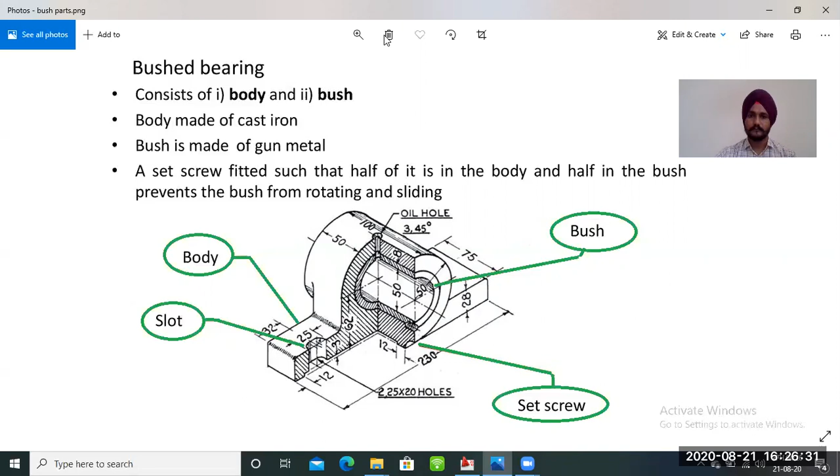You can see the bush bearing and their parts. This is the body of bush bearing, I'm going to mark it. This is the body front view, this is top view of body, this is the bush that we will insert in the body of the bush bearing.

So let's start the drawing. First of all, we will draw the body of the bush bearing. We will draw the line of 230 mm.

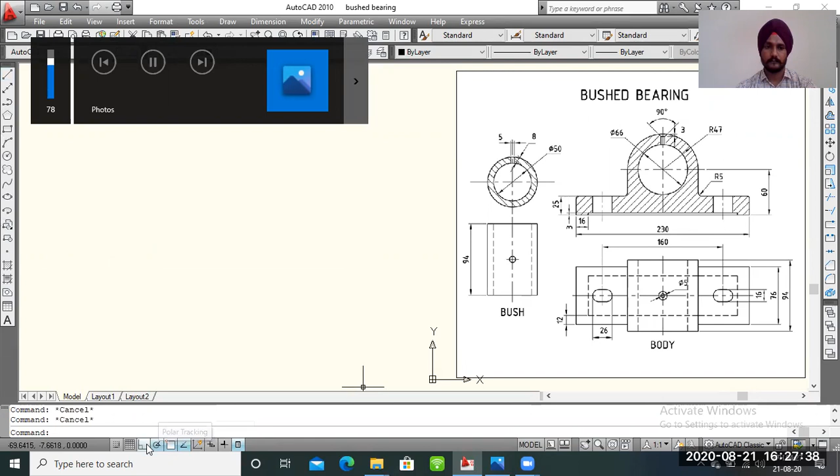After that, I will draw the thickness portion, that is 25 mm, that is height of the bush, body of the bush.

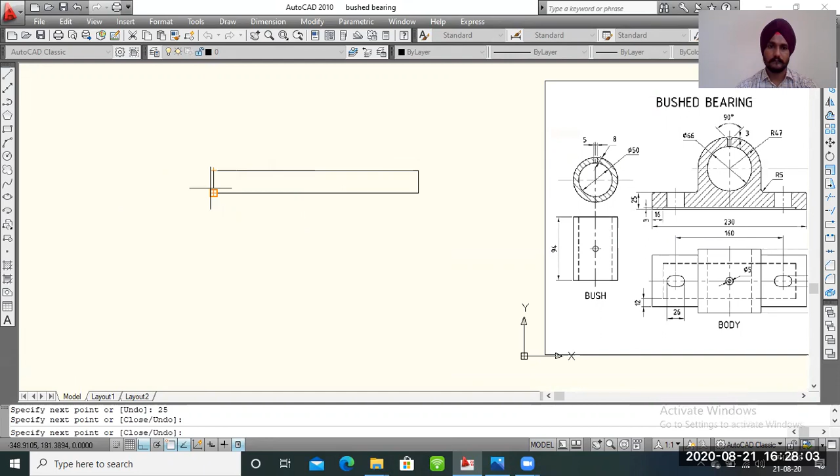Then there is a hole of radius 47 and diameter of 66 mm. We will draw the hole with the help of circle. First of all, we will locate the center of the hole. This is from the bottom of the body, 60 mm offset from the bottom of the body. So we will draw this offset of 60 mm from the body.

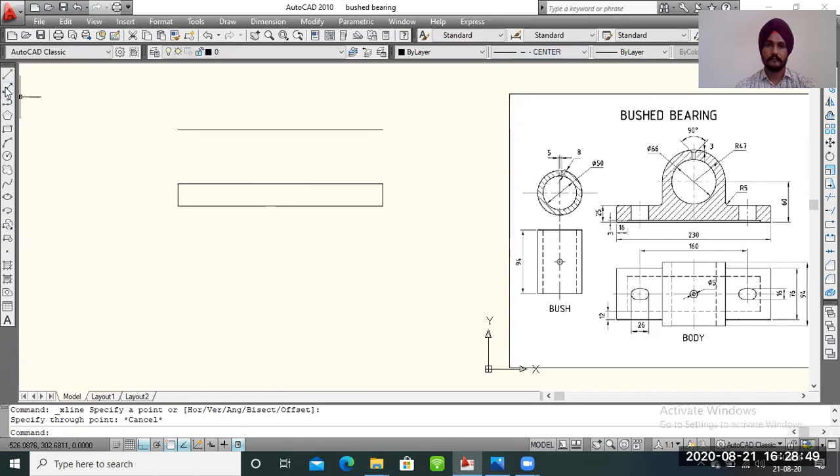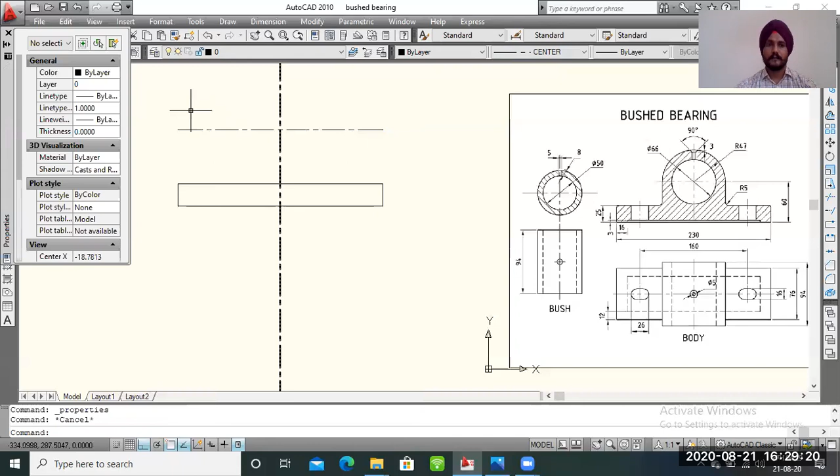After that, we will draw the center line. Center line is used in drawing to locate, to indicate the center of the circle in the drawing sheet. So I'm going to draw a circle of diameter 66 mm and another of radius 47 mm.

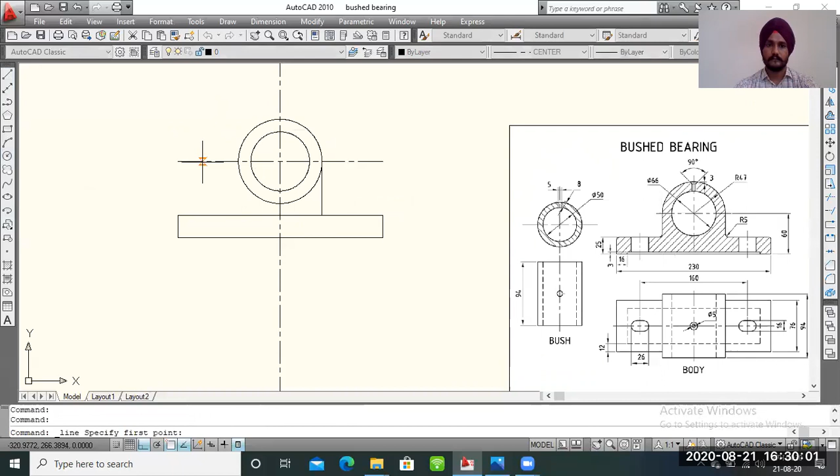After that I will trim this line. I'm going to remove the extra portion in the drawing.

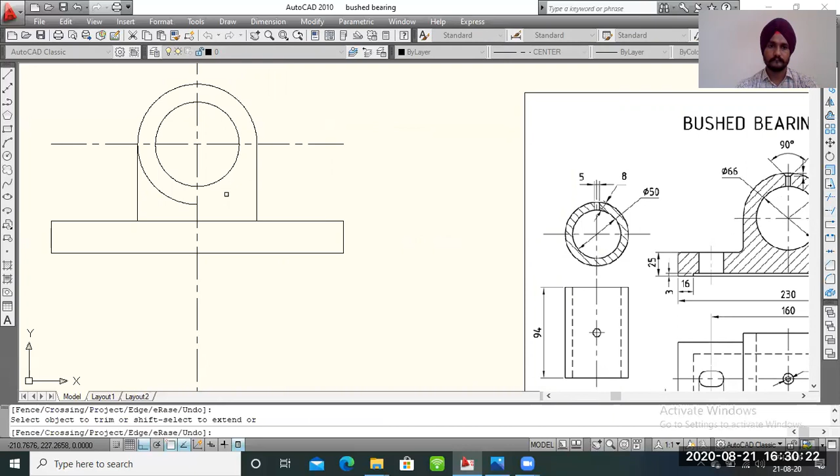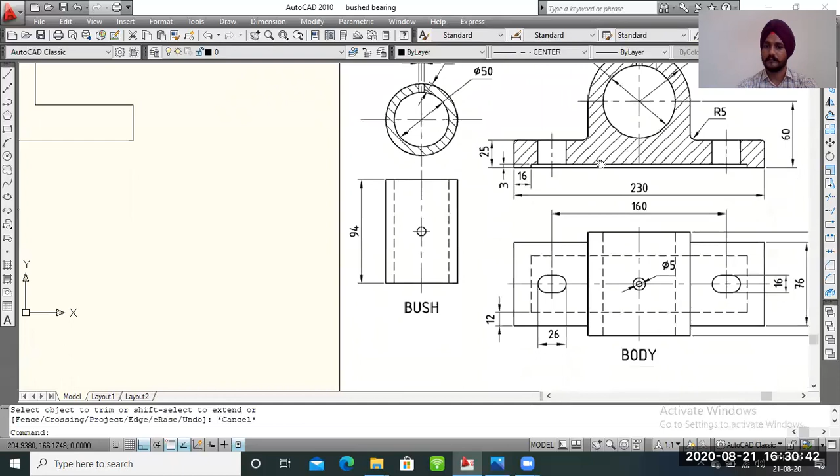Now I'm going to draw the thickness rib of slot of thickness 3 mm from the bottom side of the drawing. You can see there is hidden portion at the top side of the drawing. The thickness of slot is 3 mm and the offset is 16 mm from the edge.

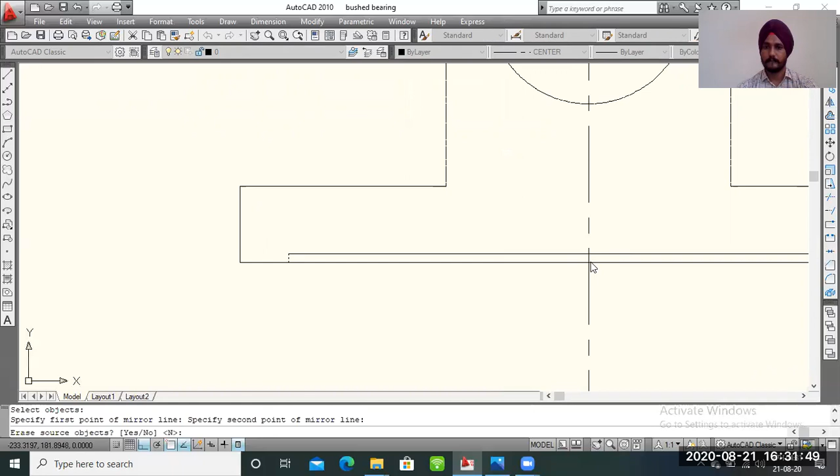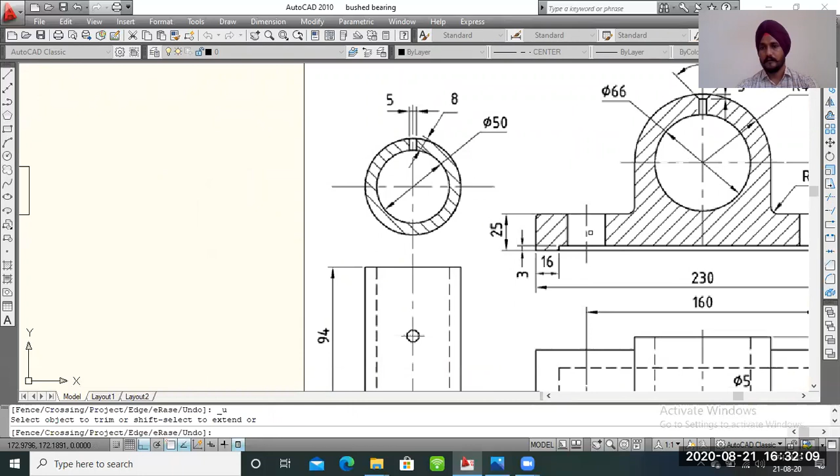I'm going to remove the extra portion in the drawing. Now I'm going to draw the slot that is used to hold the bushed bearing on a table. The size of slot is 26 mm and the center to center distance is 160 mm.

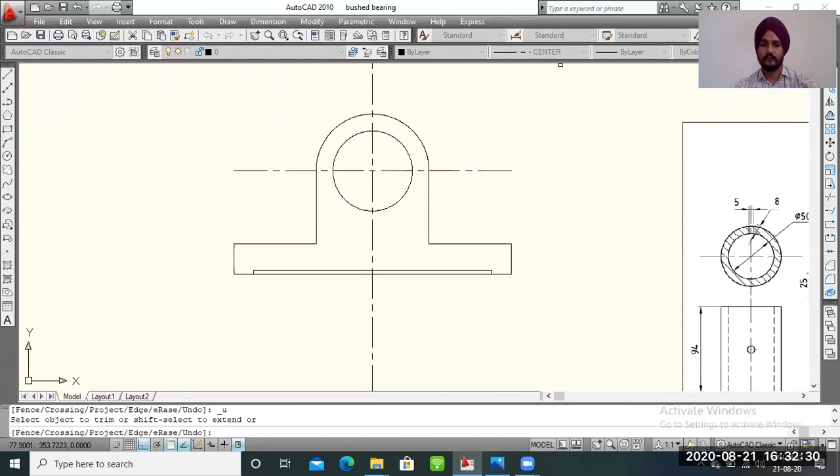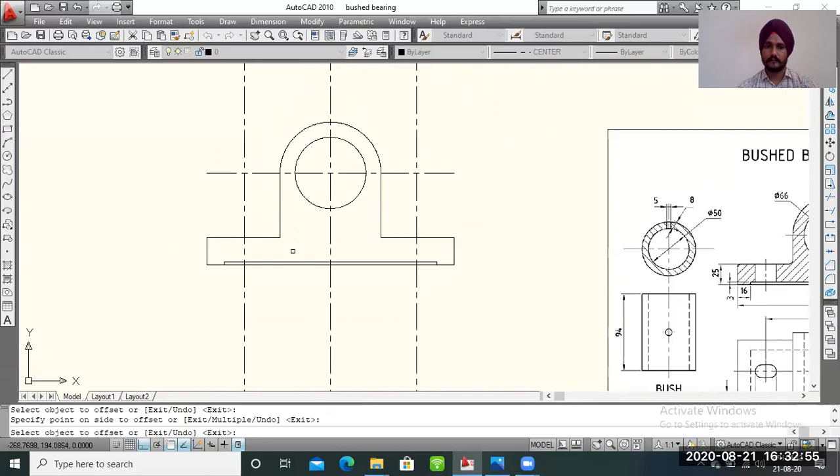So I am going to draw a line at an offset of 80 mm because the drawing is symmetry. The size is 26 mm, so I can take another offset of 13 mm on both sides.

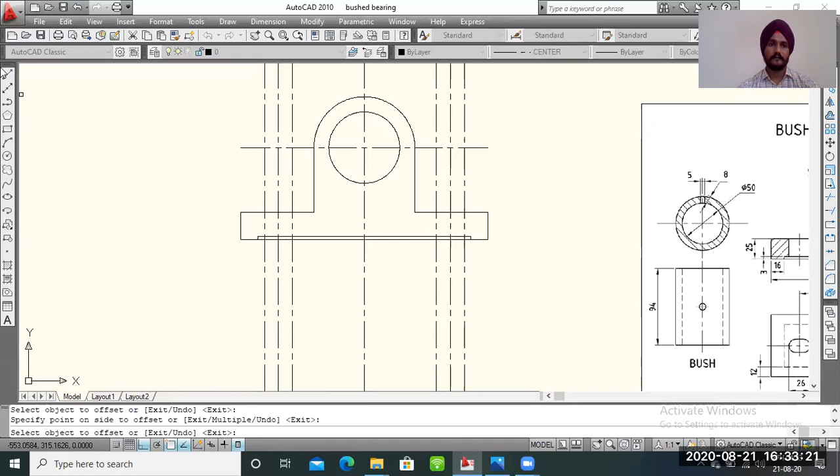Now I will finalize it. I will go to remove the extra portion in the drawing.

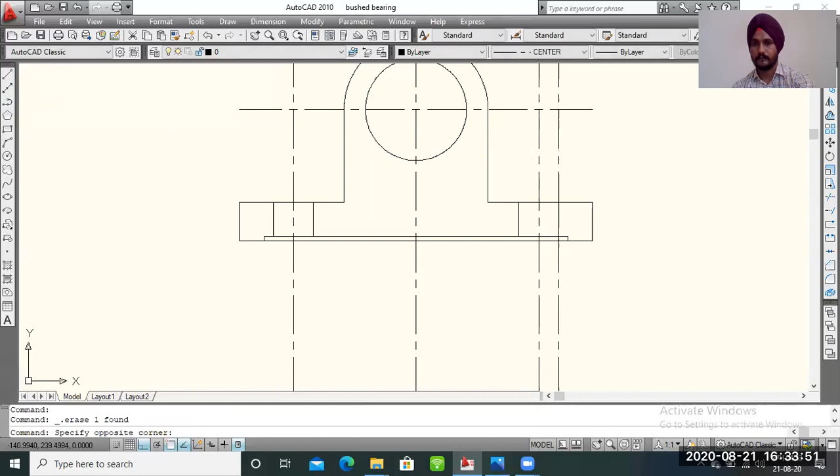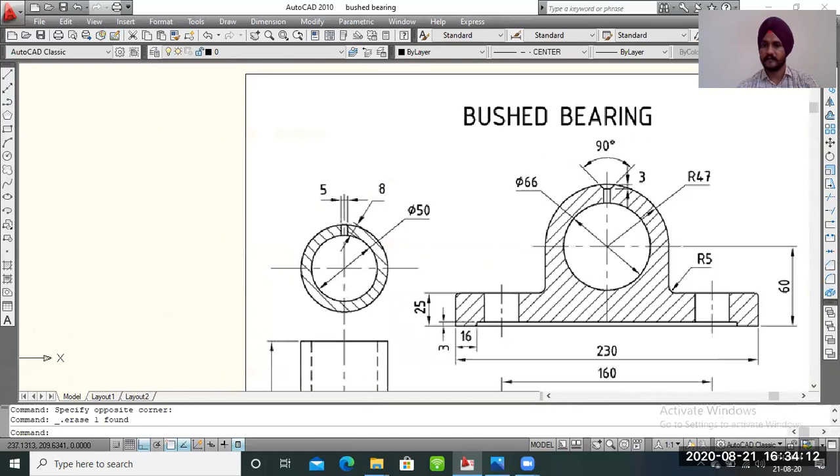Now I am going to draw the portion of oil hole in the bushed bearing. The dimension is 3 mm width and the diameter is 5 mm. So I'm going to take an offset of 2.5 mm.

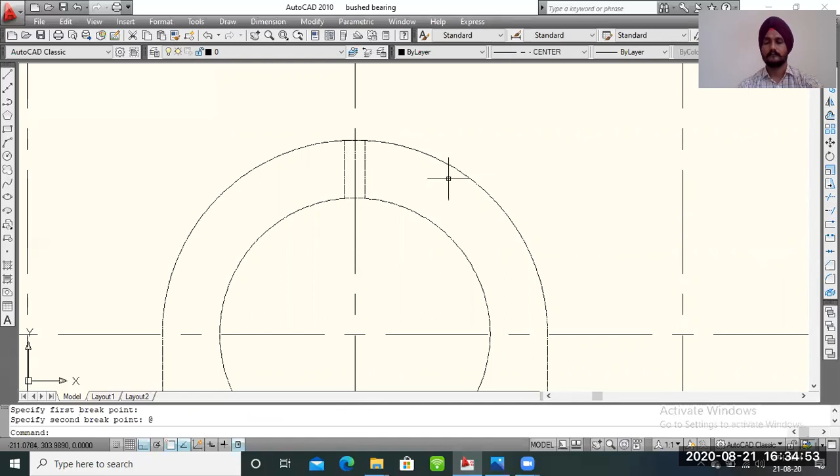and the depth is 3 mm. This should be 3 mm and the angle is 90 degrees.

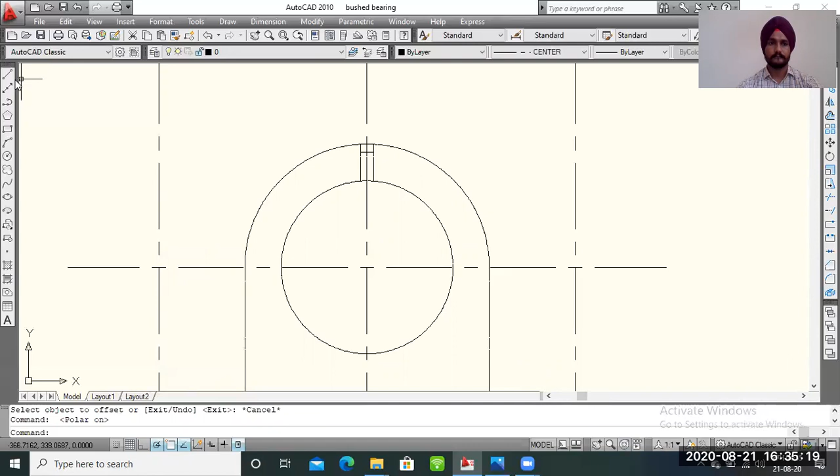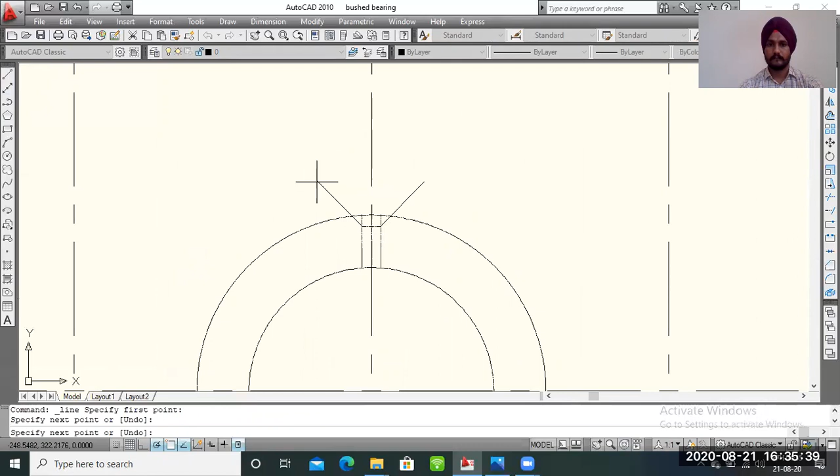So I'm going to mark it. Going to remove the extra portion in the drawing.

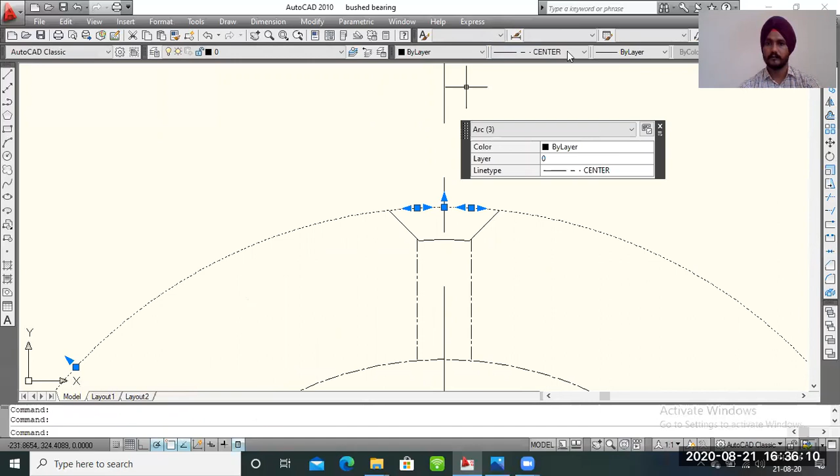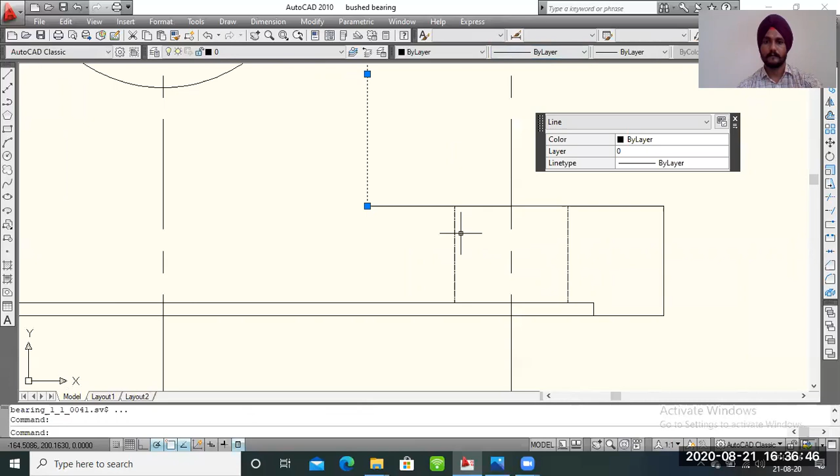The drawing is visible, so I'm going to mark the continuous line. This line should be continuous.

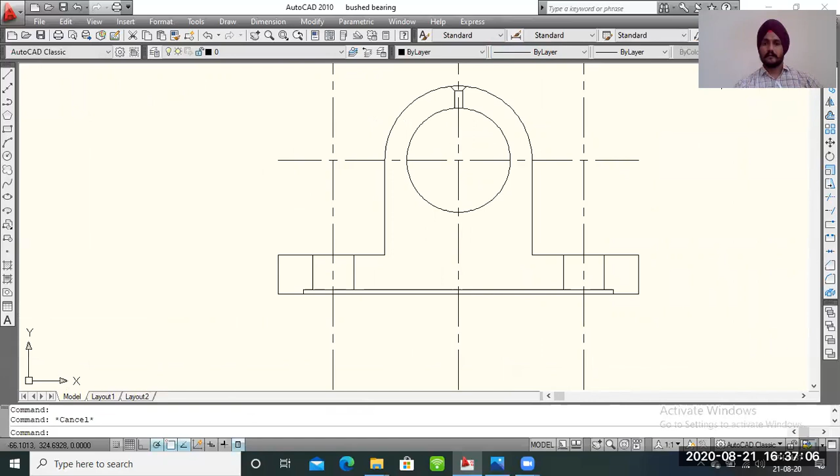So center lines are used to locate the center point of the circle or locate the symmetry of the portion. Next, this is the front view of a bushed bearing, body's front view of a bushed bearing.

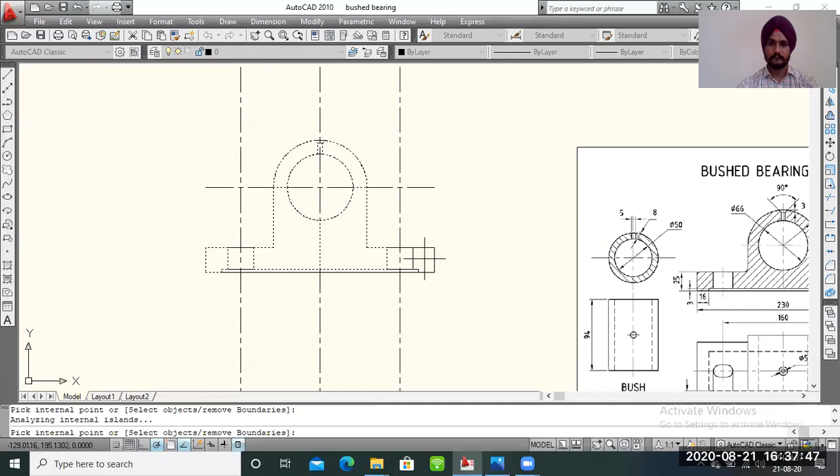Now I am going to section the portion because this is a cut sectional view of the front side. So I am going to mark the sectioning line in the front view. It should be like this because this is a cutting plane line. You cannot show the cutting portion of the drawing in visible side. We have to complete the drawing with sectional line. So this is the front view of the bushed bearing, body of a bushed bearing.

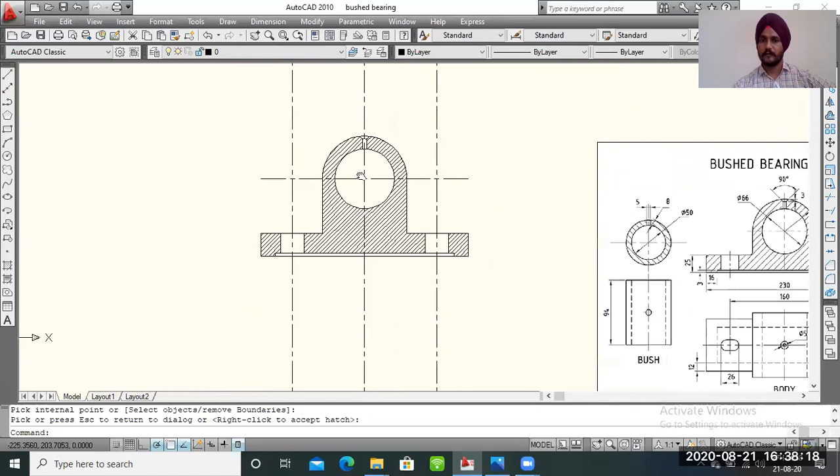So next I will draw the top view of the body. Simply I will project the projections. In drawing you can use the 3H pencil, 4H pencil for the projection lines. You should use H pencil for object lines and 2H pencil for dimension lines and center lines. So you should follow all the pencil grades in drawings.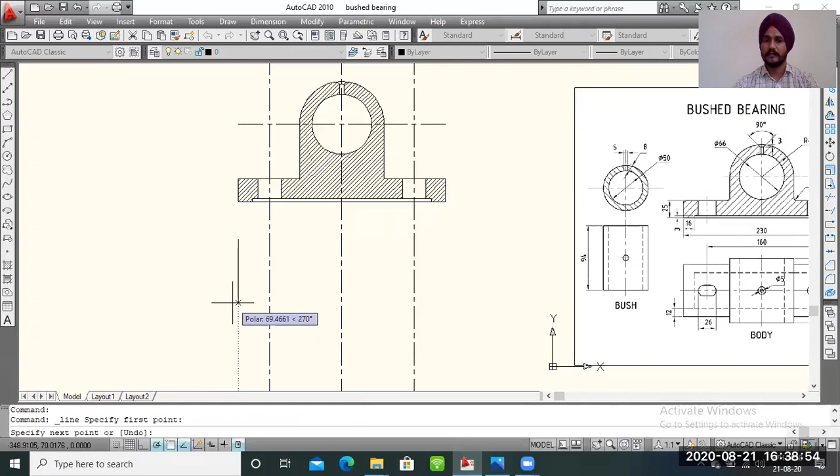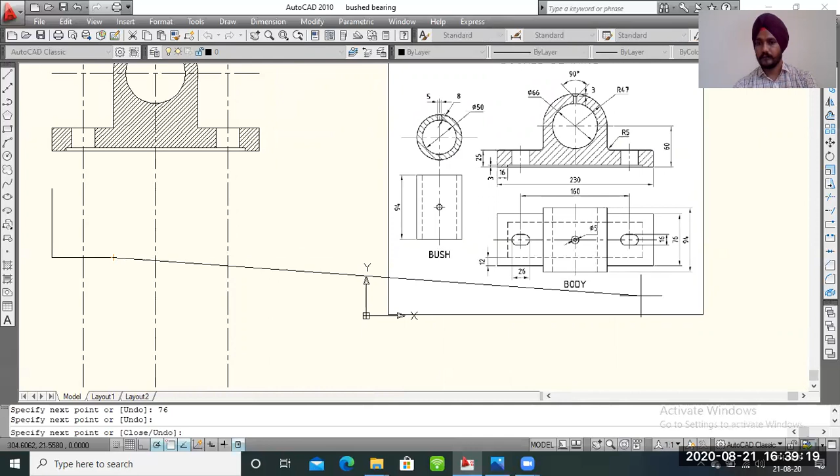So I'm going to draw the top view of the body. So the dimension of top view is 76 mm, width is 76 mm. So I'm going to mark a line of 76 mm. Then I will project the drawing. This portion is 94 mm in width, so I will take it according to this.

Projection lines make your drawing very easy. You can project your lines from the edge of the front side at the top of the view and easily draw. With the help of projection lines, you can easily draw the top view in the drawing. You can easily project the width of the object, and with the help of length you can easily draw the width of the object.

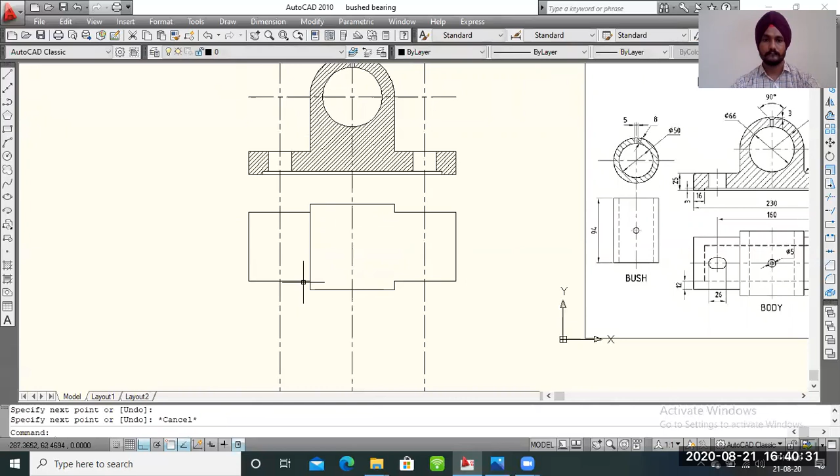The hole is the internal portion of the drawing, so it will be drawn as a hidden line. I will use the hidden line to draw the hole in the drawing sheet. I will project the diameter of the drawing to this and this.

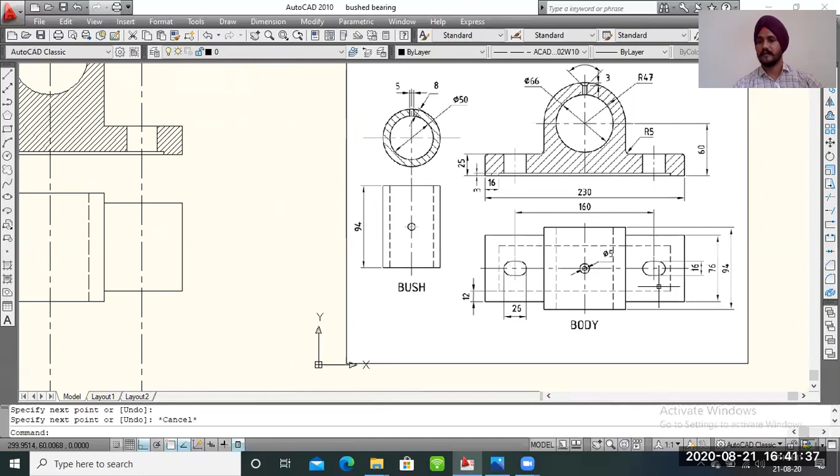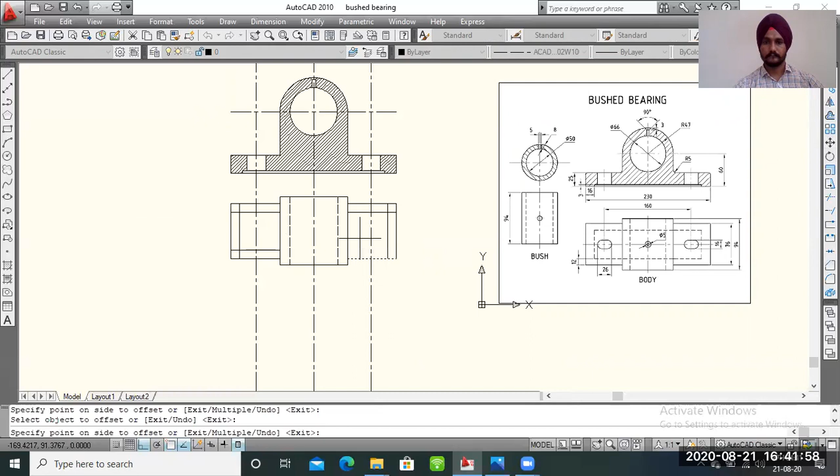This is the hidden portion, the internal portion with radius diameter 66 mm. Then there is a slot that is 3 mm in depth, so we will draw it. The size of the slot is 12 mm from each side, from the bottom, from the top view of the drawing. So we will minus 24 mm, 12 mm from each side of the drawing. I will take an offset of 12 mm and draw it. Like this you can complete it easily.

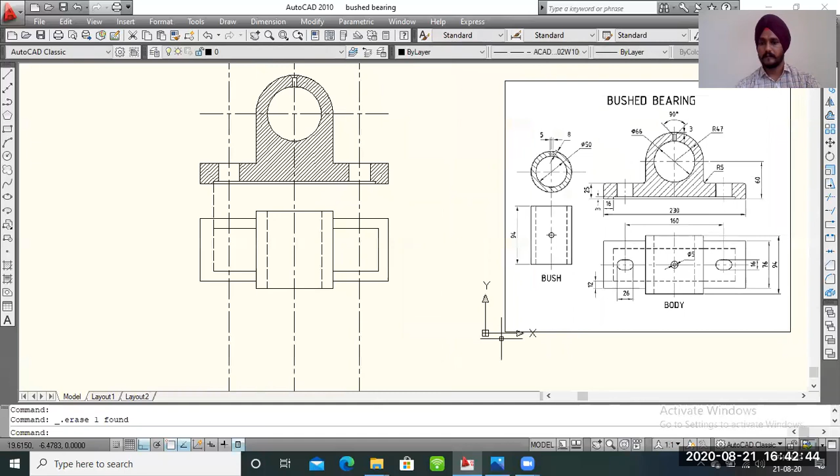This line is 60 mm. This is not 12, this is 16 mm. So I'm going to mark it again. This is 12 mm vertically, and horizontally it should be 16 mm.

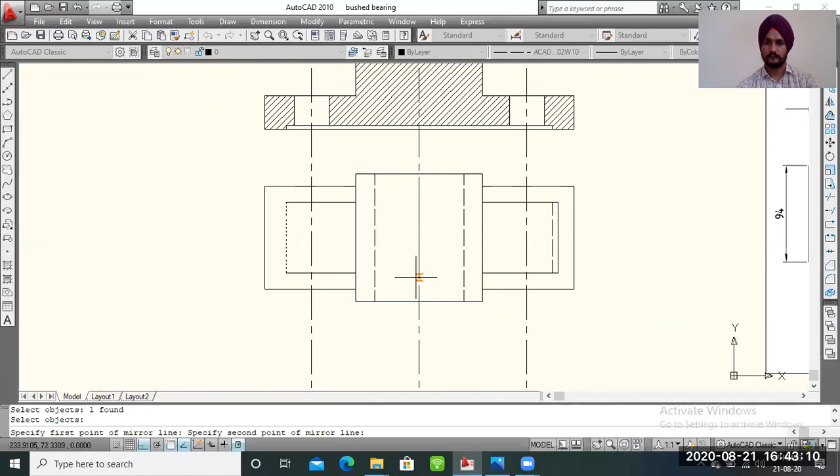Automatically you can control it.

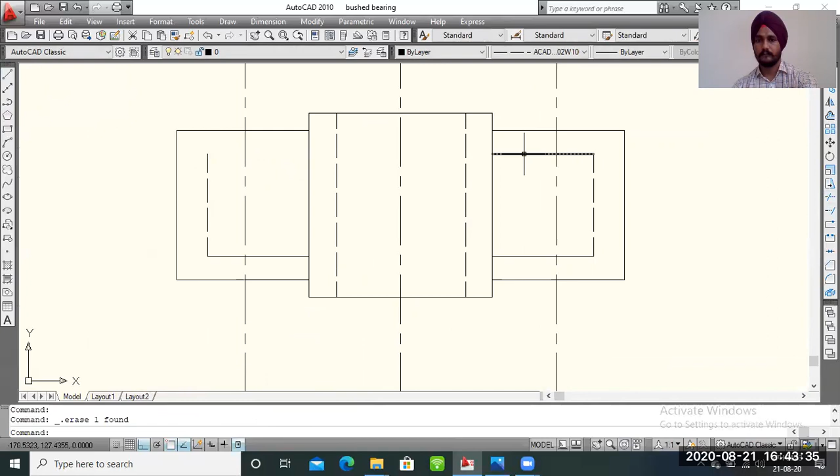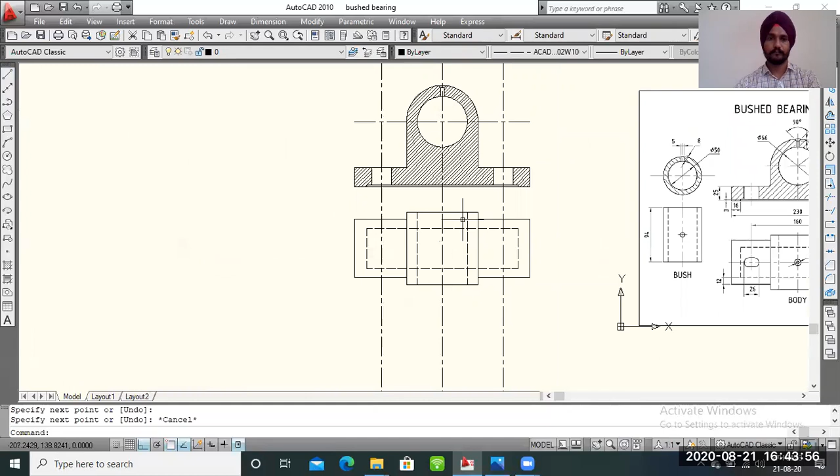This is the hidden portion, because from the top of the drawing object you cannot see this, so you have to mark it as a hidden portion. There is an oil sump in the middle of the drawing, so the diameter is 5 mm. This is visible from the top, so you will have to draw it as a visible line.

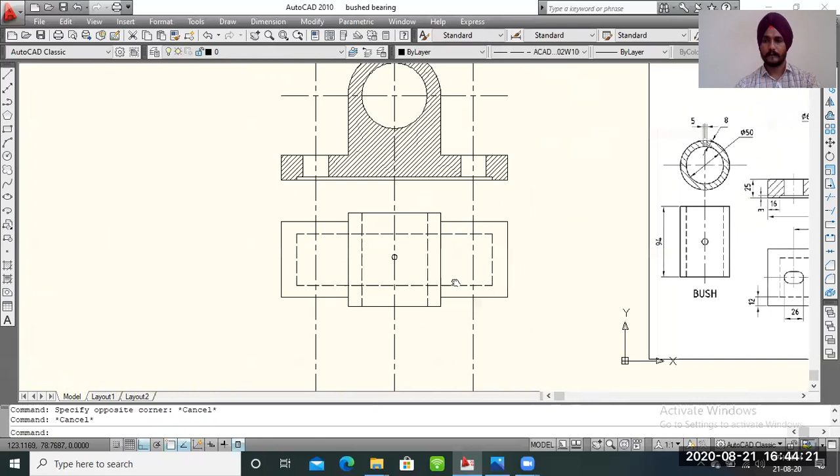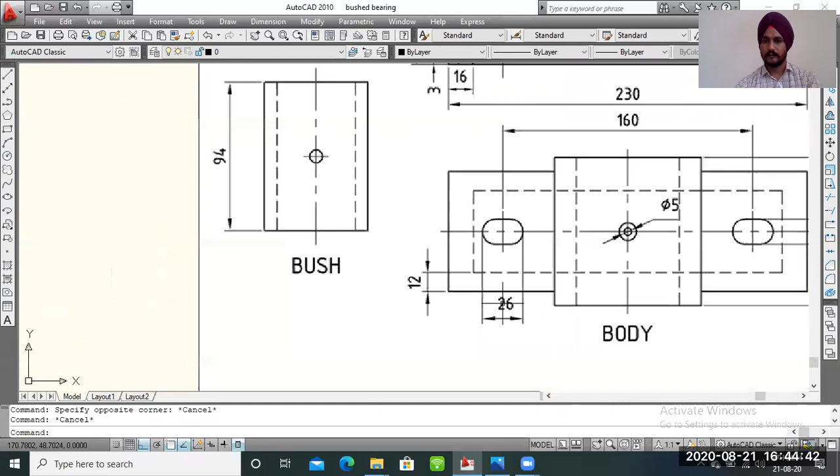Now we will draw the slot, the length and width of the slot. We will project the length as 26 mm and the width as 12 mm. The radius is not given in the drawing, so we will draw the rectangular sides of the slot.

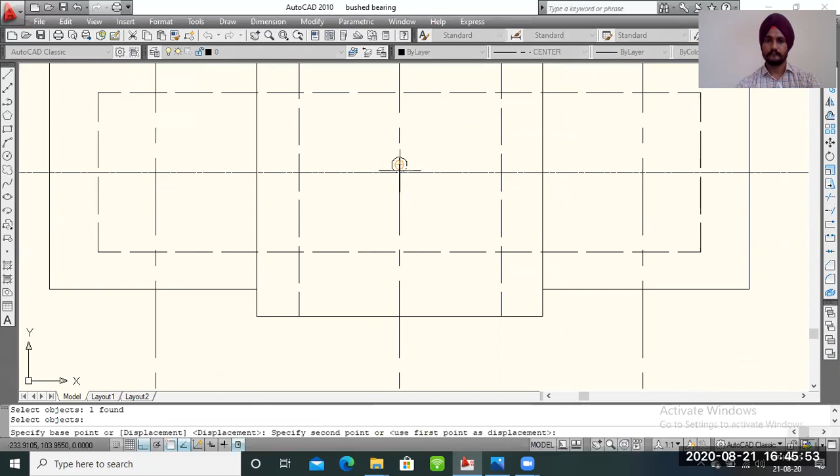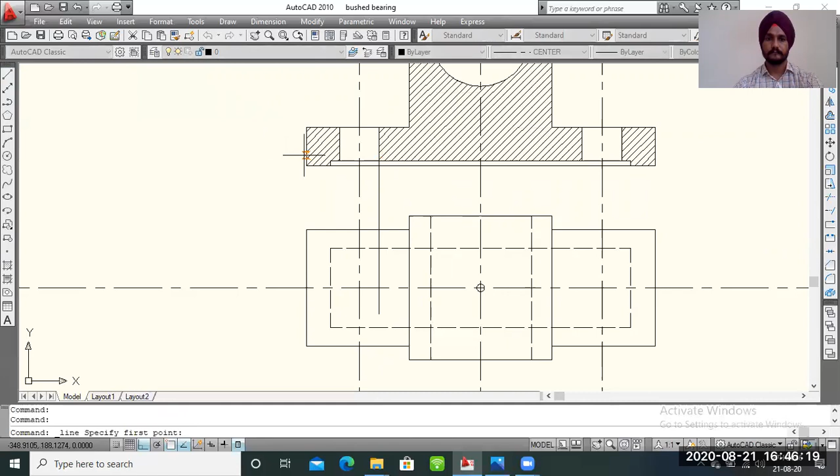After this, we will project the length of the object from the top. The projection line should be drawn with the help of a 3H or 4H pencil. It should not be merged with the object or dimensions.

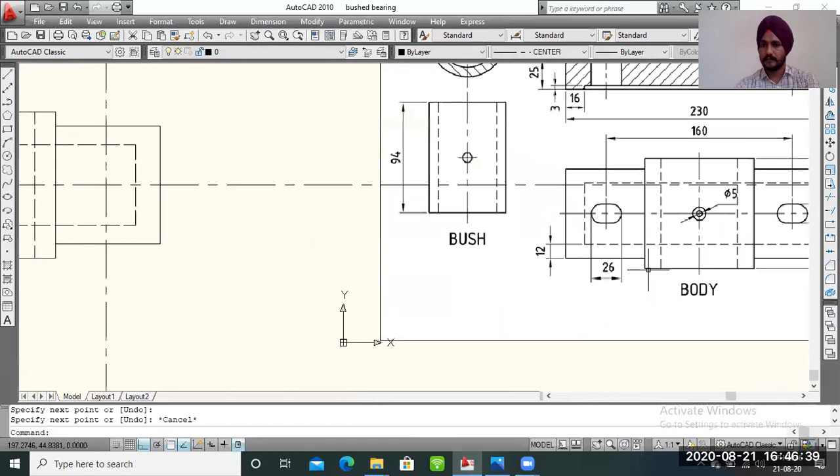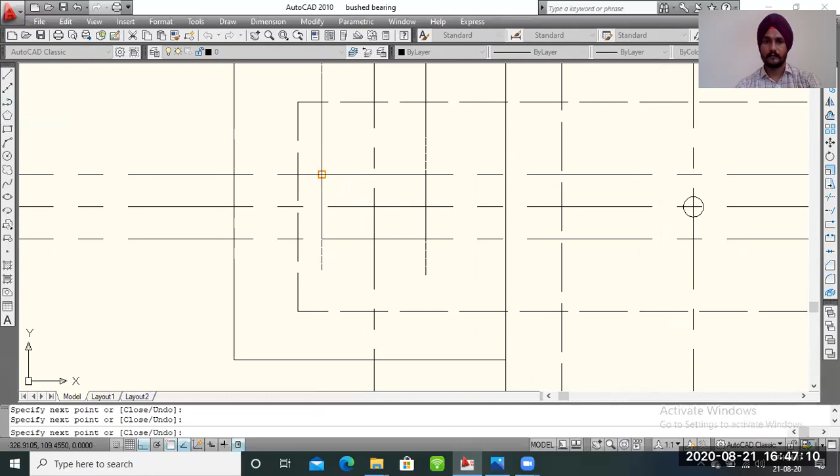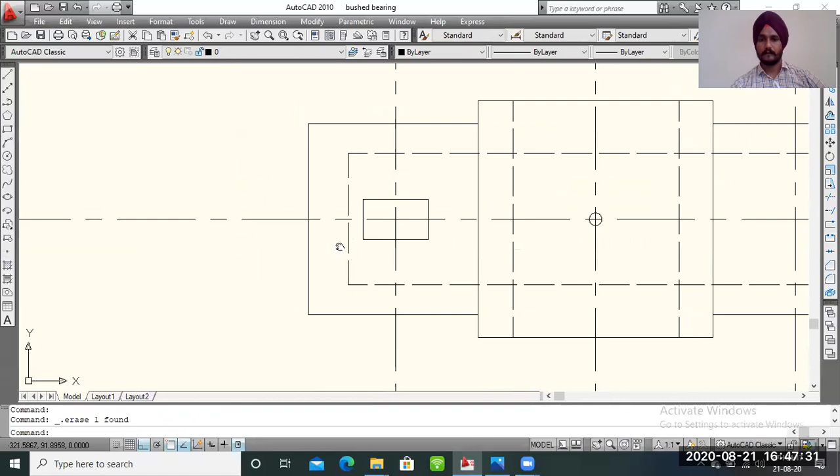This is the portion of the top view. This is the body's front view and this is the body's top view. We have completed the drawing of the body. Then we will assemble the components in the body.

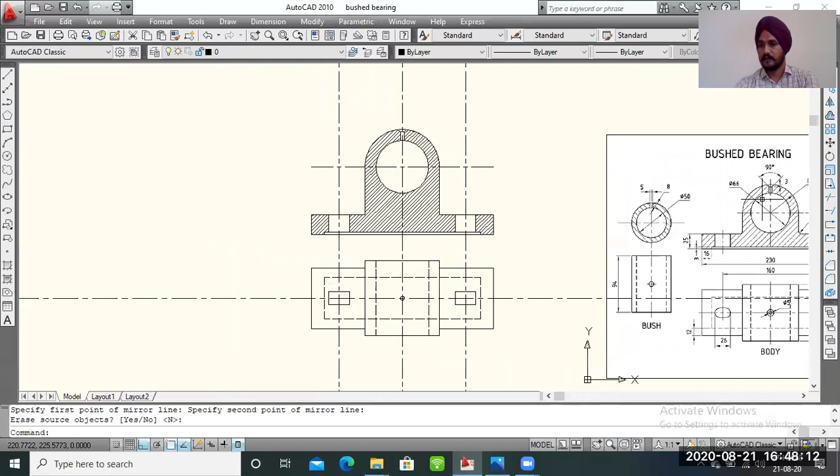I'm going to insert the bush inside the hole. The size of the bush is 50 mm internal and the outer size is 66 mm. It is not given in the drawing, but you can take it according to the internal size of the hole.

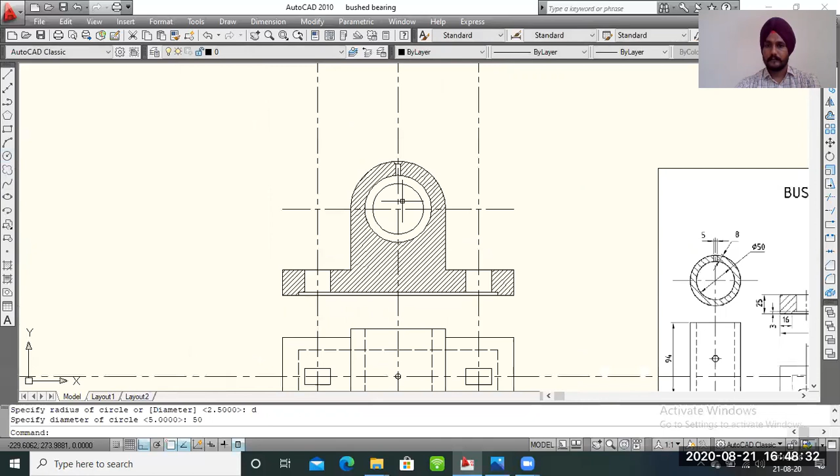So I'm going to draw a line, draw a circle of 50 mm. This is the hole. We can extend this line.

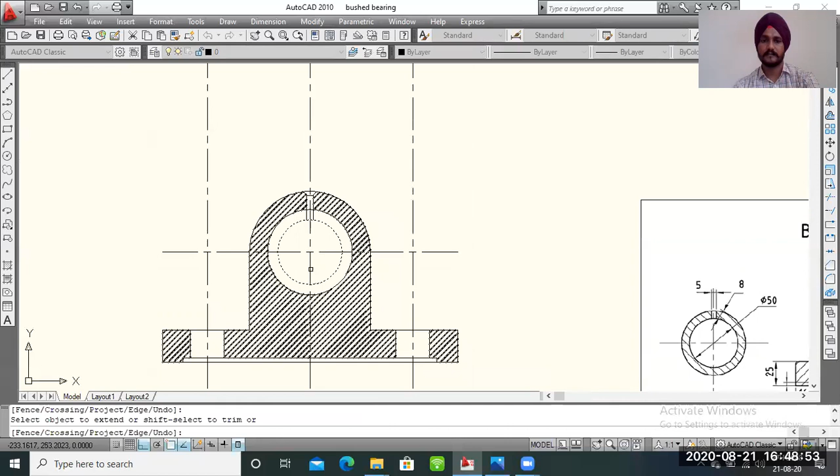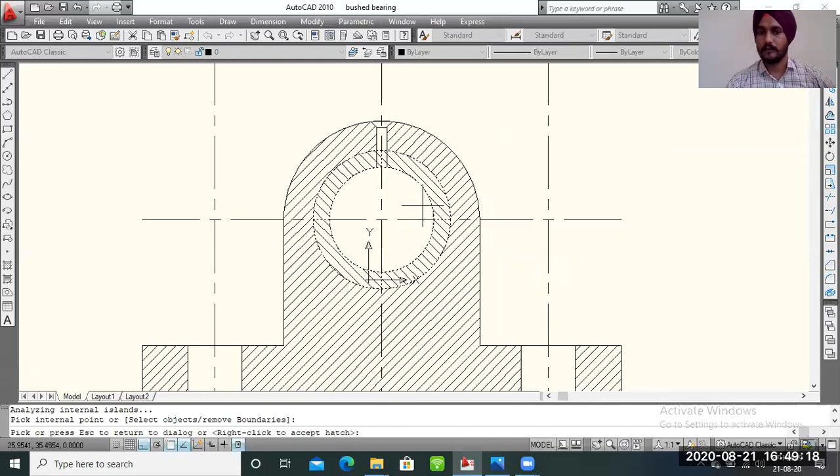After this, we will section this portion. Like this, take an opposite sectioning line, because your drawing should not be merged into other drawing components.

After this, we will complete this, which is the front view of the bush inside the body. Then we complete the top view of the bush inside the body.

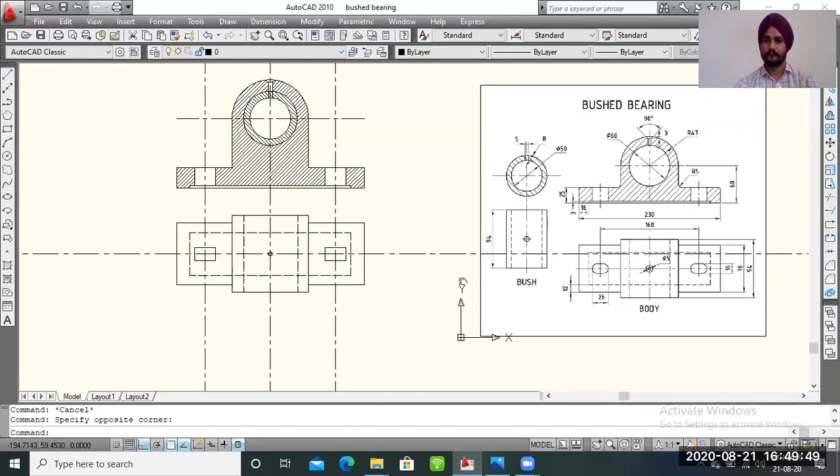So we will insert this portion in this area. You can see this is 94 mm. We have already drawn the width of 94 mm, and this is 66 mm. We have also drawn the projection of 66 mm. We have to draw only two lines for the internal portion, which is 50 mm diameter.

So I'm going to project the internal portion like this, and the second line like this. So this is how you can complete the drawing of a bushed bearing. This is the assembly drawing of a bushed bearing. This is the sectional front view of the complete bushed bearing, and this is the sectional top view of the bushed bearing.

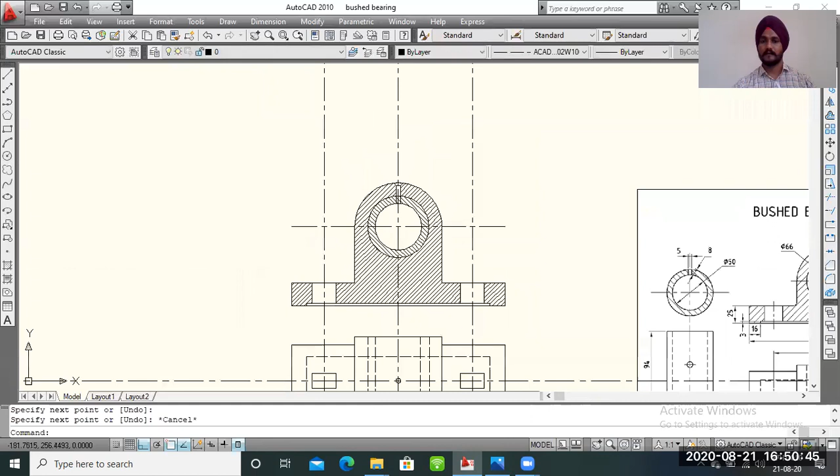Now I'm going to give dimensions on the bushed bearing.

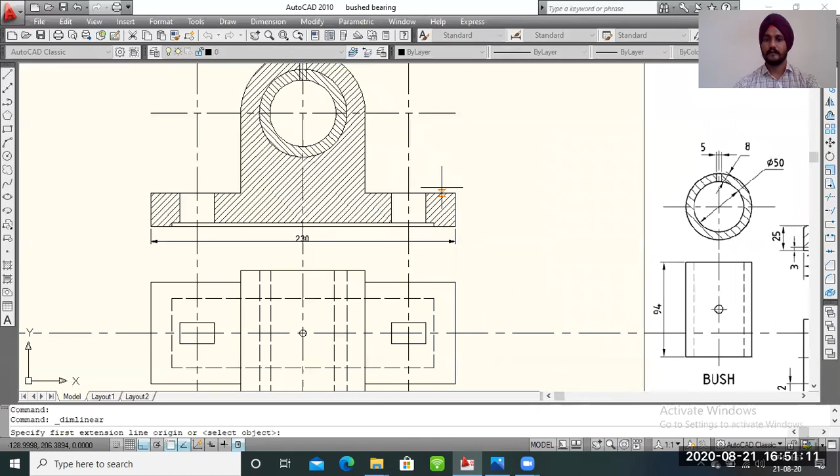The dimension should be aligned so the user can read it from the bottom of the drawing sheet and easily from the right side of the drawing sheet, and there should be a gap between the object and the dimension line. So like this you can give the dimension for the whole drawing.

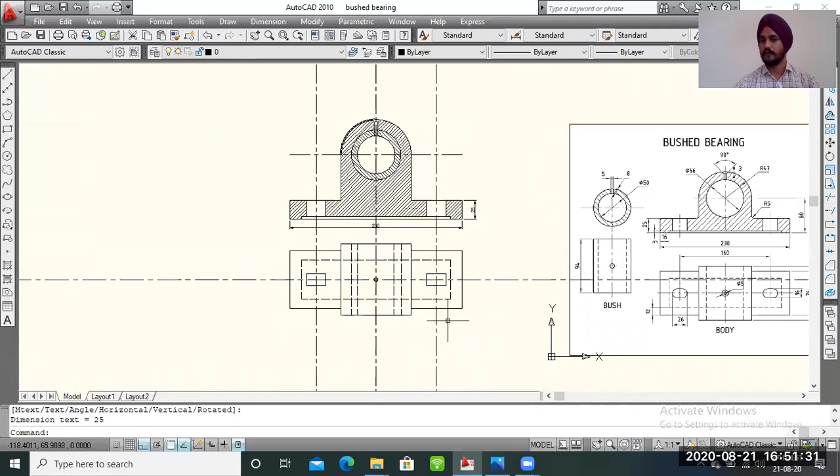This is the assembly drawing of a bushed bearing. Thank you.